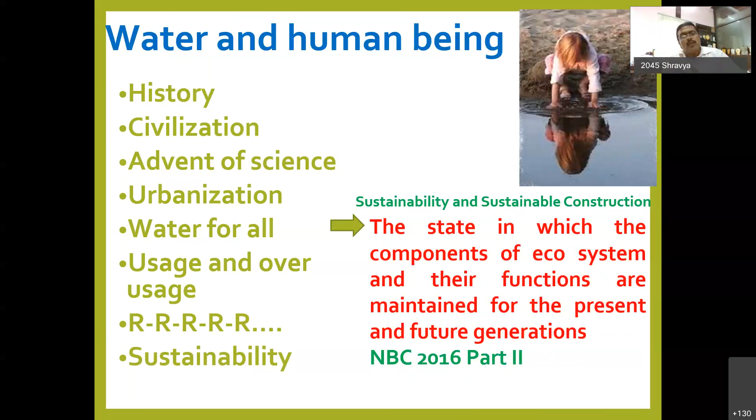So the sustainability stands very, very important in this direction also. What is sustainability? Well, the state in which the components of the ecosystem and their functions are maintained for present and future generations. Water - India was a very water-rich country once. Now it is one of the water scarce countries.

Why is it? Because of our greediness. We have not thought of our future generations. Our ancestors were okay, they were managing this within their limits. Now it is our time to work on sustainable construction so that our future generations will have a better living.

So the three major pillars of sustainable construction: economic, that is the whole world is moving with economic activities. Socio-cultural activity, this gives us an identity - our culture, our social activity gives an identity for our construction. Well, environmental - this is very important, where there is no identity. It's common for everyone, it is common for the entire world.

So what do we have to do? What is our contribution? Construction uses 40% of the energy we are consuming. We use around 42% of total water for construction. And we are using around 50% of the raw materials at the current stage. And we are also contributing to air pollution, greenhouse gases, water pollution, etc. That is always there - when development is there, there are some pros, there are some cons.

Then how to overcome it? Let's see, friends - water. What is the quantity of water available in the whole world? We all know the whole world is 70% filled with water, only 30% is land. Out of that 70% of water, we have around 97% in the sea, it is saline water, we are not able to drink.

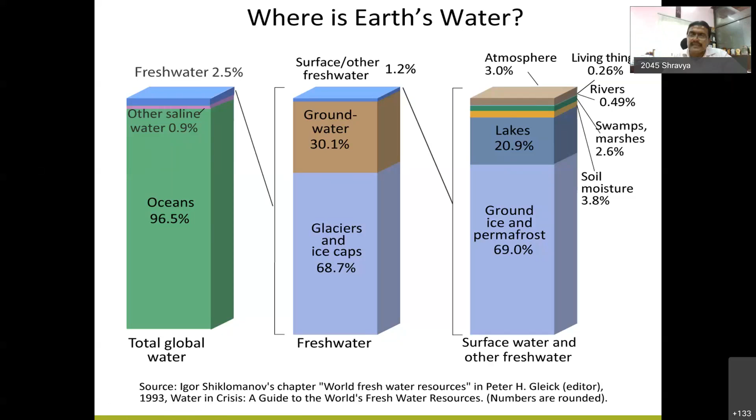In such a drastic situation, we are overusing and wasting water. A lot has been talked about agriculture and domestic wastage. We spend a lot of time targeting 130 liters per day per person water supply in our urban areas. But what is happening? How much are they actually using? A study says it's around 250 to 350 liters. Even at 250 liters, a large amount of water is being wasted or overused.

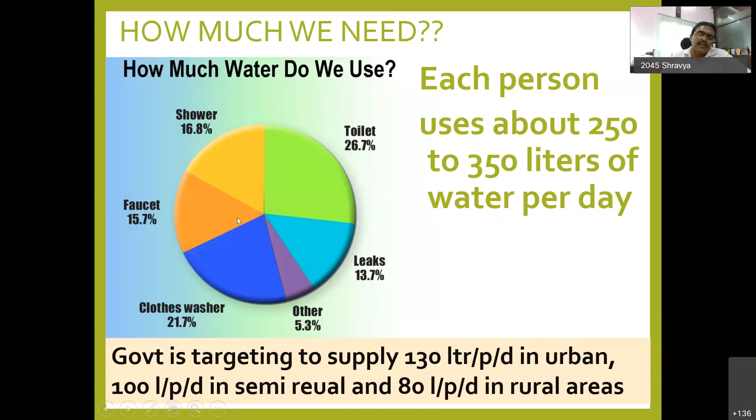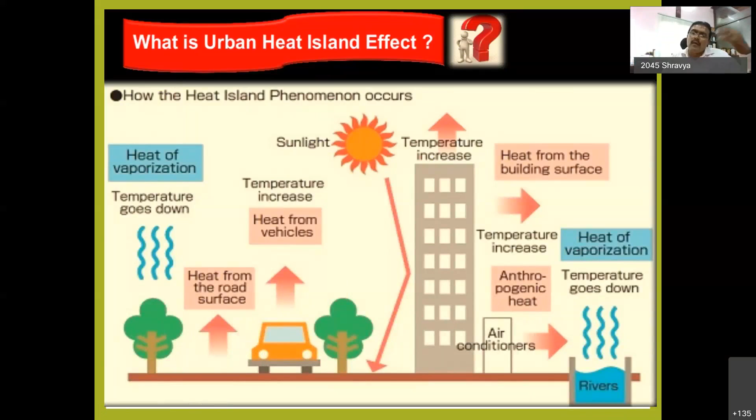This figure shows where the water is being wasted. This slide, taken from Ajit sir, clearly shows how much the construction industry contributes to the heat going away from the earth. It might be temperature from buildings, air conditioning, roads, trains, tarmac yards, and many more, with hardly any greenery. So if more and more heat is generated, more global warming is likely to happen. Does this mean we'll get more rains?

Let's see. The water crisis in India is man-made. A lot of articles are being published. Our waterman of India, Dr. Rajendra Singh, says that another 5 years down the line, if we do not take care of water resources, 20 cities in our country are going to run dry. There's already one country in the world, Cape Town, which has already been announced, or is likely to be announced, as a zero water country. There's no water source available for them. You can see a lot of videos on YouTube with a lot of comments, and articles spreading that cities are going dry in the years to come. So we need to be careful.

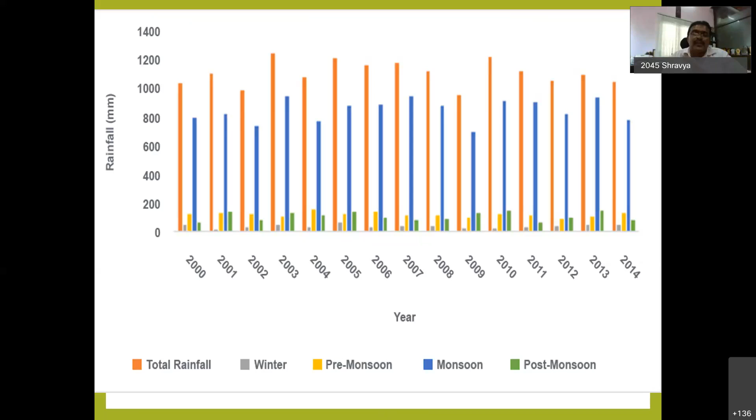Now, is nature creating this problem? Is there a shortfall of rains? If you take the statistics, hardly one or two years here and there show a shortfall. For the past 70 years, there is an average rainfall happening, which nature is giving us in the entire country. Our national average of rainfall is 1025 millimeters annually. So nature is doing its job. It's our duty to save, conserve, and preserve.

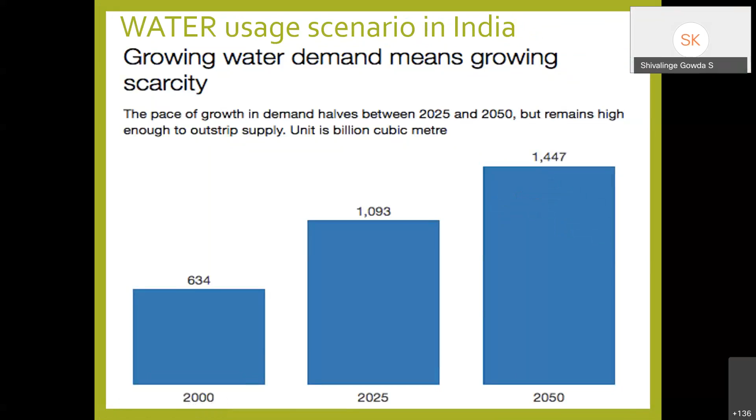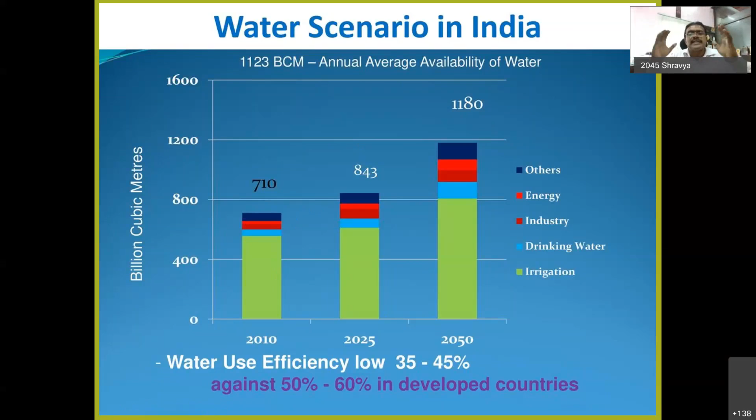As urbanization grows, we have this problem. As the demand for water increases, the scarcity also increases. As Rajendra Singh said, by 2025 we'll be having a lot of problems, including Bangalore and Chennai. This is a very clear example of why it is 2025. Now we are somewhere managing between 700 to 750. So anytime, another 5 years down the line, we all have to take equal importance on saving, conserving, and preserving water.

Friends, does more warming lead to more rains? No, it doesn't happen that there will be a sudden gush of water in a particular period, but average rainfall remains the same. Water may prove even more critical than energy. That is why I congratulated ACCE Bangalore Center for giving water main importance in this series, next to energy, because water and energy are two faces of the same coin. Water has far-reaching implications in the areas of climate change, human habitation, health, and economics. So we need to take care of water.

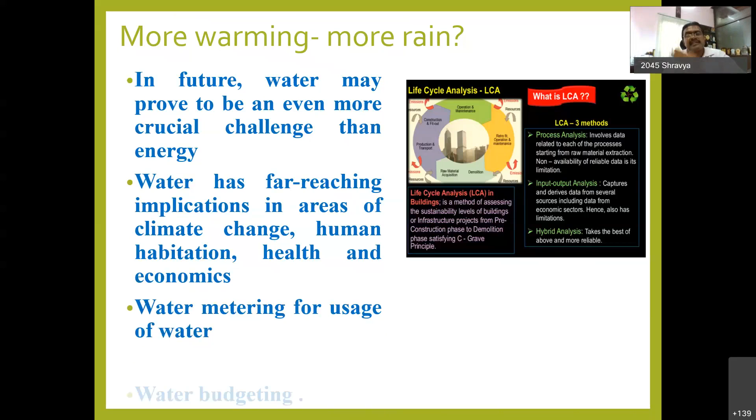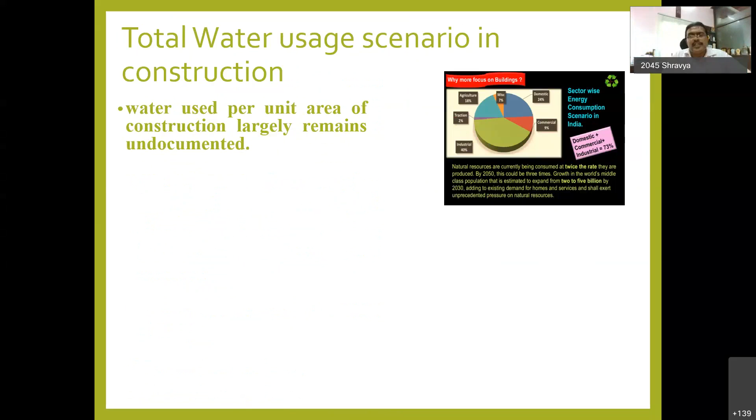How is it possible? Well, we need to do metering, budgeting, etc. in construction. Hardly any work has been done. Nor are the engineers, builders, and technocrats bothered to really work out how much water has been used in construction. A calculation by Jadavpur University in 2016 found that 27 kiloliters are used per square meter of built-up area. That is the amount of water we are using in our construction on average.

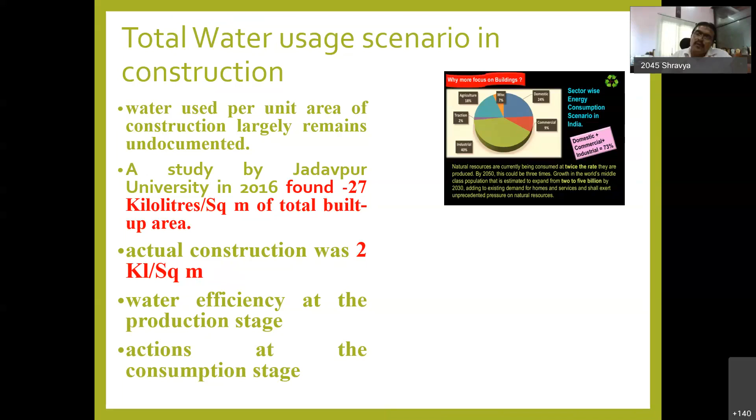Very interesting is that actual construction takes place with only 2 kiloliters of water per square meter. Then where did that other 25 kiloliters go? Well, it is used in the production stage. That means the construction industry, the production industry, is also playing a major role, and they have to take a lot of measures to save, conserve, and preserve water. So, actions in the consumption stage are what we are now discussing. We need to have a brainstorming session with the industrialists on techniques to save, conserve, and preserve water.

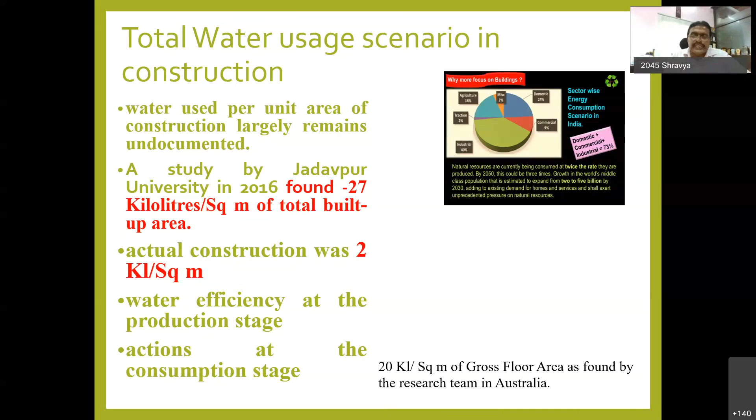In the world, they say 20 kiloliters per square meter of gross floor area is used. In Australia, they say they are the lowest. That means we have a lot of scope in introducing water-efficient construction. Now, what does the Indian Green Building Council say? This is a very interesting slide. Energy saving is around 20 to 30%, but water saving is 30 to 50%. That is the target.

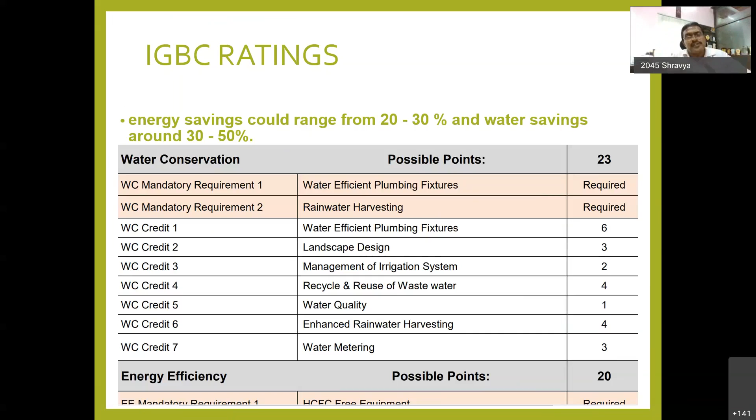In the IGBC rating statement, they say they have given 23 points for water, whereas for energy it's only 20 points. That means water conservation comes first, then comes energy conservation. The technocrats and the think tank are already thinking that water conservation is of prime importance in the days to come. Energy will follow. So let's work more.

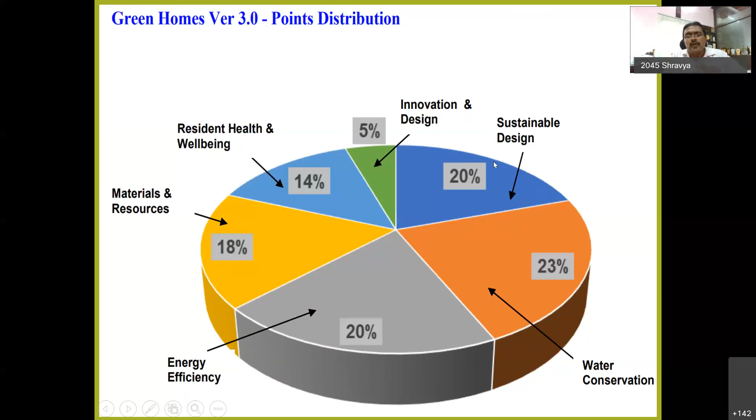See, here's an example: 20% and 23%. Resources play a major role where 18% is there. And sustainable design and innovative design plays another 25%, where we play a major role. So we have a lot of scope to work on this, friends. As far as construction is concerned, there's a lot of scope here too. I'll give you more details on energy efficiency in the slides to come.

Now coming to the design part of it. It's very easy to say, oh, it's a very airy building and we have a lot of energy saving in this building. But how does that come about?

It comes from the wonderful greenery which we have planted. Where does that greenery come from? It comes from water content in the soil. And if the water content has to be retained, you need to have trees. Once you have trees, they give fresh air. Once it gives fresh air, you have a cooler atmosphere, and it goes on. There will be energy saving in the building also.

So the design aspect has to be designed at a 360-degree angle. I have seen in private designing, as far as private projects are concerned, our owners are really concerned about the total concept of their project.

But I'm very sorry to say, as far as government buildings are concerned, they're only bothered about one aspect: the building. They build it, construct it, and leave it. Whether the building is serviceable, whether there's sufficient water in the toilets, whether there's sufficient drinking water in the premises - the designer of the building is not ready to explain. That's a tragic affair. This has to be instilled in the minds of all building designers, especially in the civil engineering department.

So we have to avoid eco-sensitive sites - forests, lakes, canals, corridors, wetlands, floodlands. We all know this. But the greedy owner, the greedy builder, if he occupies the lakes - if one builder is not willing, there will be another builder ready, or if one lobby isn't, another lobby is ready. So we need to curtail this. We need to follow the IGBC guidelines very strictly. Our National Building Code also tells you very clearly how we have to go about buildings. Let's follow that.

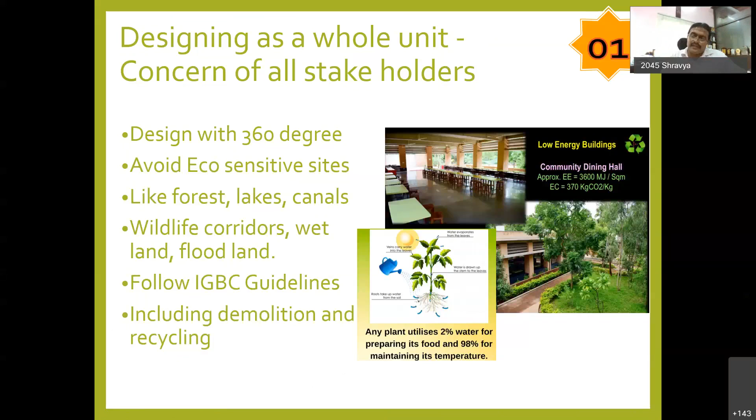So why is water and plantation necessary? Because only 2% of water is used for giving you fruits and food. 98% maintains the groundwater content and the temperature of the atmosphere. That's why we need to have a good ecosystem also.

This is a fantastic slide given by Ajay Sabne sir, where I don't have to explain anything. This is a wonderful slide showing we have to work with the ecosystem so that there will be energy saving and water saving also. We have to minimize the development footprint, especially where natural areas exist, and re-establish damaged ecosystems. Okay, these are general items.

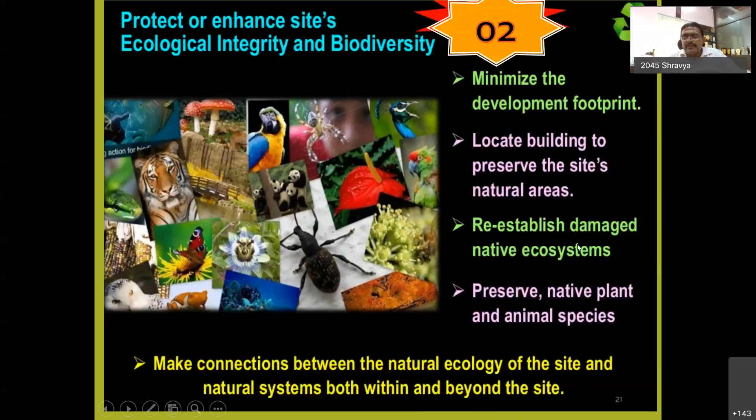Let me give you some more specific details. Especially when you go to a construction site, maintain the existing water flow system. Here's how it happens: suppose in your large site of say 1 acre, 2 acres, there's a drain running through it, and you have to build a building there. You are forced to divert the drain to the corner of the compound and take it to the backside. But the quantity of water coming is only during the rainy season, which you're not realizing, and it's likely to overflow, and your site is going to be flooded.

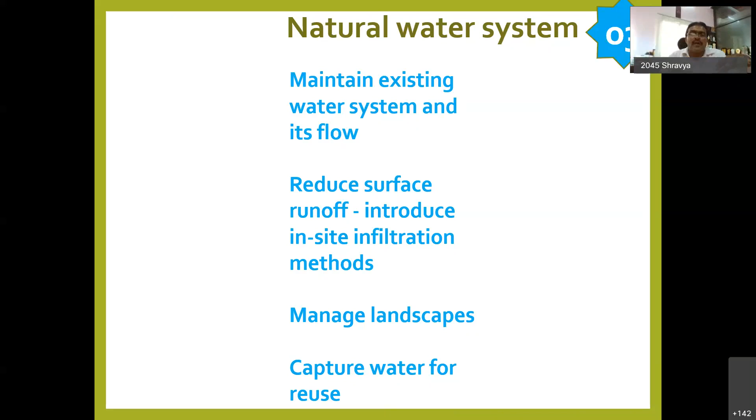So we need to think very clearly in this direction. Surface runoff has to be thought of, and whatever surface runoff there is, it should not spoil the building structure. So we need to ensure there are some percolation pits. Let us do some percolation pits - whether it's washing water for laborers, toilets, curing water, or wastewater going out of the building - let it not be drained out. Let it go into filtration and into the ground. So here's a small example of how, in a small way, water goes into the ground. The earth is really hungry for water.

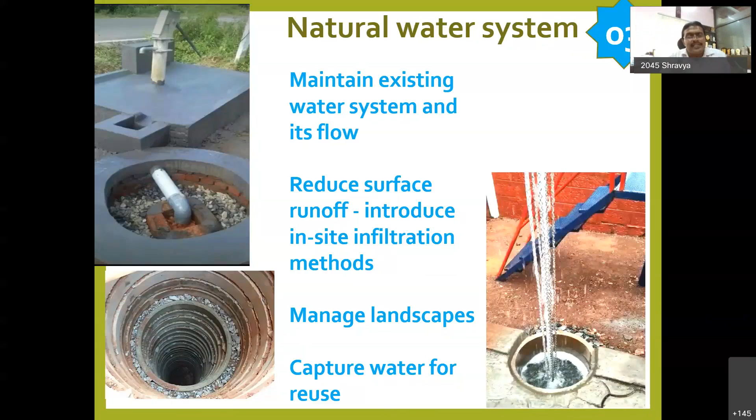It's a small percolation pit, but the amount of water it is taking is enormous. If you don't have space, don't worry, go deep. When we are ready to go deep to extract water, why hesitate to do percolation pits which are deep enough to let water into the ground? Let's do that in our sites so that water is recharged into the ground.

Then there is masonry. The masonry construction itself, on an average, takes 350 liters of water per square meter. Now technology has come where Wienerberger has a glue where you can avoid water totally in the construction of masonry.

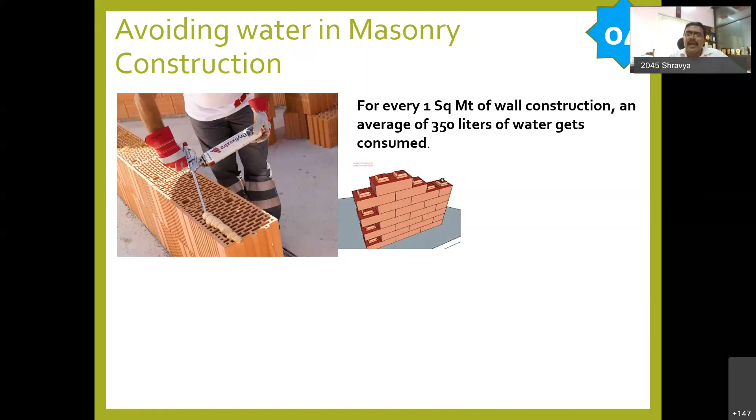There are innovative bricks which have come up in the market where you don't have to use any mortar and you can straight away start constructing. I have practically used this type of construction and these type of blocks where you hardly have to use any mortar. This knot will take up all your interlocking system, and you hardly use any water.

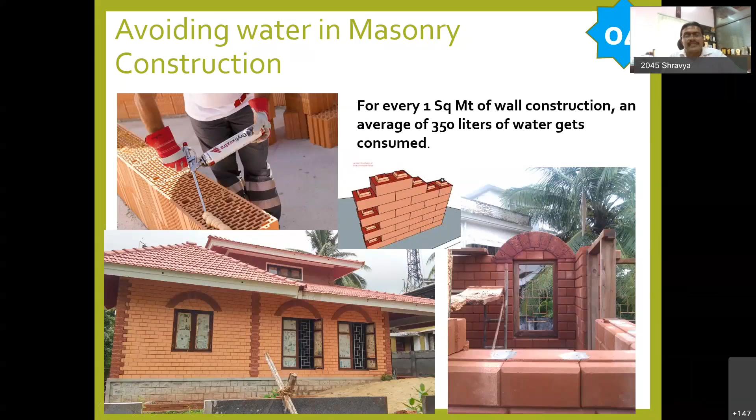And this is a mud block building. This is a stabilized mud blocks building, and it is hydraulically compressed, and hardly any curing is needed. So you save a lot of water during construction, and later it gives thermal comfort. It saves a lot of energy also.

One more area where our designers, engineers, and owners can play a role: earlier, all the taps had inefficient knobs. Just open the knob, all the water used to flow directly. Now there is something called aerators. Let's try to put aerators in all the taps possible. Wherever we use them, whatever the purpose, let's put aerators.

And if you don't put aerators, especially in gardening, there are spray pumps and spray knobs available where you can water your garden too. These hardly cost anything, just around 200 to 300 rupees per aerator, and it can save up to 30 to 50% of water wastage.

Apart from that, there are bubble taps nowadays which give you water in the form of bubbles, which is very efficient and solves all your washing problems. There are sensor fittings and push button taps too. Sensor fittings are very efficient, but they're costly, probably not possible in our apartment buildings. But in other areas, definitely yes, it is getting popular slowly.

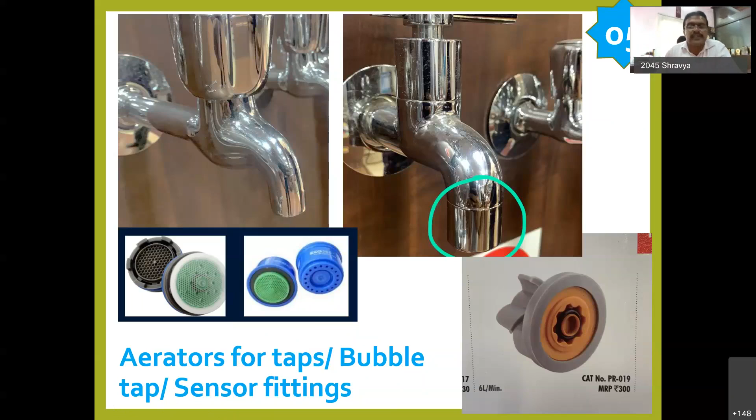There are water efficient fixtures now. Waterless urinals are being used, especially in public buildings and public toilets. Then closets with 6 liters per flush are very efficient as per current guidelines. Then we have dual pipelines. Many apartments and green buildings suggest dual pipelines from the septic tank or STP lines, so the gray recycled water can be used for reflushing also.

Then bib cock arrangements. Nowadays taps come with a bib cock attachment where you can control the output of your tap, whether it's a faucet or a tap. You can control it, which is much more convenient rather than having a bib cock below your tank or below your wash basin, where it's not possible to reach them.

Am I audible? Yes, you are. Please go ahead, sir.

Then let us try to put push button taps for all public taps. It must be made mandatory within our mind, because the public doesn't say it, the owner doesn't say it, the authorities don't say it — it is our duty to save water. So use push button taps invariably for all public taps so that water is not wasted.

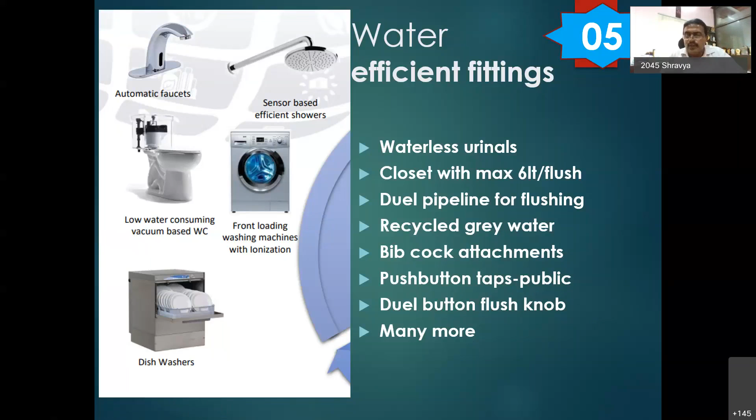We have low water consuming vacuum based WCs coming up now. We have sensor based showers. Automatic faucets are there already. Then we already have dual flush knobs for our water closets, and many more are coming. Let's look forward to them and use them very effectively.

This is one of the very efficient water usage systems for drainage, that is the biodigester. Again, I'm talking from my own experience where I have installed it in my own office, and it is running very efficiently. It is a very eco-friendly system.

Absolutely no power is required. This 4 feet by 4 feet by 4 feet pit has a capacity for 50 people in the building. When training happens, there are more than 100 to 150 people coming in, so I thought 50 people average would be nice.

It is already 4 years down the line, and absolutely no problem, no power required. It is a DRDO, Defence Research and Development Organisation patented technology, and there are TOT transfer agencies in Bengaluru and Hubli. They give you enzymes and can supply this, or you can make your own tank with your own materials. It can be masonry, concrete, or ferrocement, but it should be leak proof.

So very low space requirement. My leach pit was almost 2.5 times bigger than this, and I could manage with 4 feet by 4 feet by 4 feet, or 1.2 meters by 1.2 meters. The output is only clear water. It is not potable, but it is clear water used for gardening, and greenery development is very easy. So an existing septic tank or STP can be easily converted. We are heading towards 100% recycling.

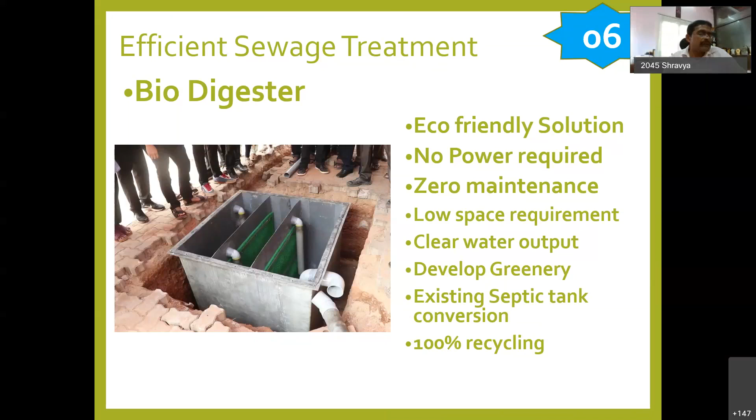Now, how can we save water in designing, and how can we save water in green building construction? Nowadays, friends, it is high time we are forced to use proper ventilation and open space, because we need more air. The buildings are very nearby and we don't have much space, so we look for larger building areas and a lot of open space within the building.

This house is designed by me, and as soon as you enter, it is your kitchen, come dining, come puja, come living, all in one, absolutely open. When there's a family gathering, they are very happy doing joint activities including cooking and eating. That saves a lot of wall space, wall length, and construction cost too.

Then, efficient space management and locally available materials will help you a lot. We all know locally available materials help to a large extent, where it reduces the carbon footprint also. Then local techniques - you can see here, it's all age-old techniques like arch construction.

We have totally avoided lintels and provided a reinforced brick lintel here. It's only a 6 feet wide opening, so a reinforced brick lintel is used, and hardly any concrete lintels are used.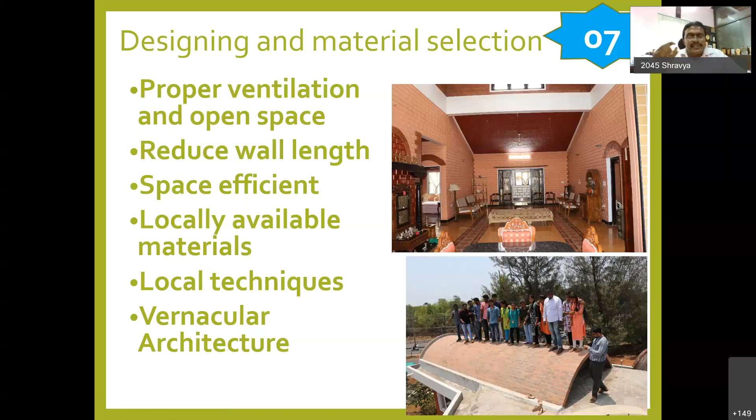The entire building is not plastered, unlike the wooden buildings, so you reduce the cement content also and give importance to vernacular architecture. It might be a dome construction, or it might be a vault construction. A vault and a dome can take a sufficient amount of load. See the students standing there - they wanted to check it, and they were standing and jumping on it, and I was very confident that my vault, a single layer brick, was going to be very strong.

Eco-friendly and green construction is also very important as far as the building is concerned. Let's try to work on these one by one.

Usage of locally available materials will always help you. Avoid steel, cement, and cement-intensive materials and techniques. I might be a little controversial here, but the water consumption to produce steel, cement, and aluminum is the highest compared to any other raw material in the construction industry. So I make it a point that if you avoid cement, steel, and aluminum to a large extent, you will probably have a very eco-friendly green construction.

Right from the foundation, there are a lot of techniques available - we can think of arch foundation, which is very efficient, especially in compound walls, residences, and multi-storied buildings. You need to take care because you have plinth beams there, so it's not always possible, but for openings we have arches, as I've already shown you.

Here too there's an arch, and again in this house - this is the kitchen, and this is the living and dining, the front one being the living, all in one area. Next, we have mud block and rammed earth walls, which are very comfortable for living inside.

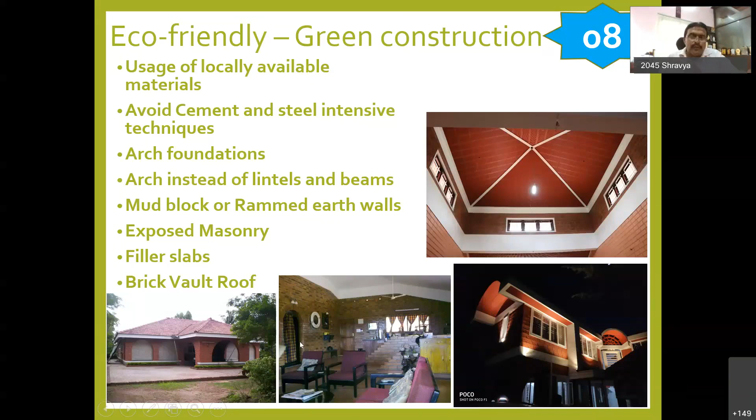Coming to rainwater harvesting, this is an important aspect where I've noticed, sorry to say, engineers, designers, and owners say they just want it for license purposes - do some technique and finish it off, let's do it for the namesake. No, please don't do that. If we engineers say we're doing it for the namesake, owners definitely won't be bothered, and the public will say it's a waste technique.

No. When water falls from the roof, it is free of cost. Nature gives us water free of cost. Just because it's free, let's not waste it and leave it in the drains, and then struggle for water in our residences and offices. The Ministry of Jal Shakti is working very hard to provide water for everyone. It is our duty to give water to whoever needs it.

Friends, when we say we need to do rainwater harvesting, you have to put water into your own well or your own ground. The common question people ask me is whether their well will get benefited, or will they get the benefit if they do a percolation pit and send it into the ground - or is it only benefiting somebody else down the line? Sir, it is not like that.

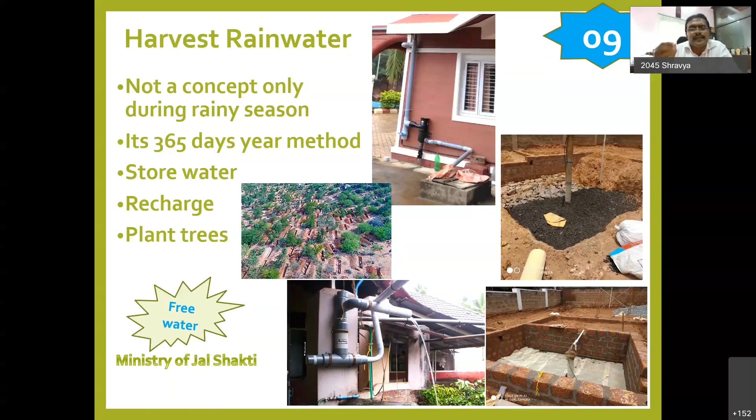If not, do percolation pits. In your empty sites, please do percolation pits and leave it like that. And definitely, two years down the line, you will see greenery growing all around.

There's a classic example of a village Sarpanch who said we need to do a water budget for the entire village. This colleague is now in Maharashtra, and they are successful. They can calculate water. If I'm going out of time, please remind me.

If you're going out of time, see, you need to calculate, you need to budget. Water is like money. Earlier we used to get water free of cost everywhere. Now it's not like that. Now water is money - we are purchasing water, even one liter of water we are spending 10 rupees for a bottle. So it is very, very important in the future days that we need to save and preserve water.

We need to budget for water. That's a very good example - how do you calculate the water? One meter by one meter, one millimeter is one liter. Friends, very simple: one meter by one meter, one millimeter equals one liter.

So water quantity is nothing but area in square meters multiplied by the surface area coefficient, that is the runoff coefficient or absorbing coefficient. For a slab or tile roof, it is generally 0.95. On a yard, it is 0.5. For concrete roads and drains, it is 0.5. For a mud area, it is around 0.6. For a garden or turf, it is around 0.4 to 0.5, something like that.

So you multiply by the average rainfall of that area. If it's Bangalore, rainfall is around 1,000... in Mangalore it is 3,500 millimeters of water. In spite of getting 3,500 millimeters of water, I'm very sorry to say Mangalore in summer is struggling, needing water tankers to supply water.